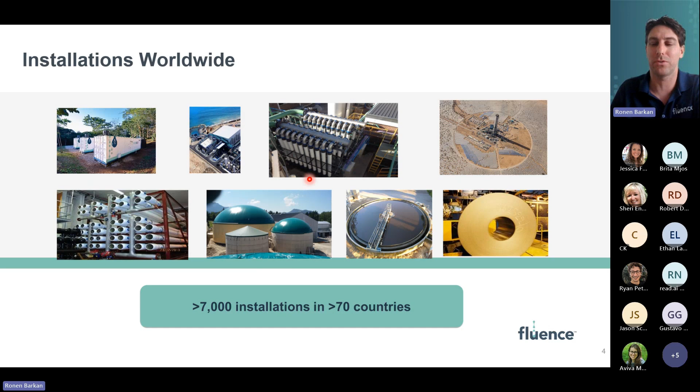So as I mentioned before, Fluence has over 7,000 installations in over 70 countries, addressing very large projects of millions of gallons a day. But then they're also addressing very small projects of as little as 5,000 gallons a day. So pretty diverse portfolio there. And the way we're able to address those different market segments is just by developing different product lines, which I will focus on one today, and hopefully you'll understand why.

The one that I'm focusing on today is basically a product that is geared towards what we refer to as decentralized application. By decentralized, which is shown on the right hand on the screen, versus centralized, we're talking about where the treatment of the wastewater will take place, or the water, right? So a centralized approach would mean that you're collecting water from different sources and then pumping it to one centralized location where it all gets treated. That is how many cities work, or municipalities.

And if you've ever tried to develop a new neighborhood or whatnot, many times you'll try to tie into the municipal sewer line, and that would mean that you're operating in an environment that is more centralized, right? Because you're connecting to a municipal line, all the waste goes into that line, and from there to a centralized treatment facility.

With technology, Fluence came up with a more decentralized concept, which basically means that we've come up with this product line that is able to locally take the wastewater and treat it, as I said, locally, and then treat it to an extent that you can actually reuse it. And so you're avoiding all these unnecessary pipes and piping, saving not you necessarily, but the city on the capital cost of putting those big pipes in the ground and then investing all the energy to move the water or the wastewater around for long distances.

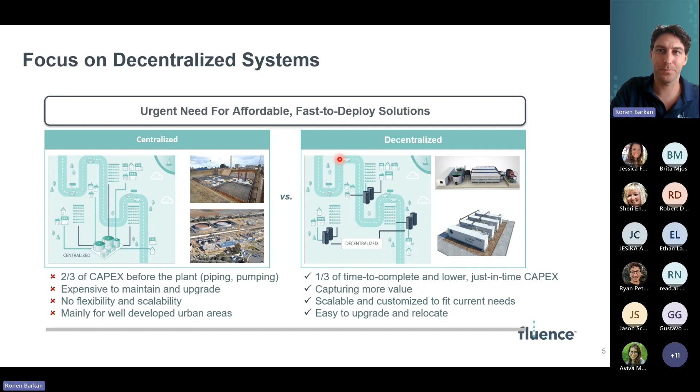As I mentioned, Fluence, we both are offering water treatment as well as wastewater treatment. So by water treatment, that means that, as I mentioned, you would need to provide potable water to that development. So you would either utilize a local source of water, may that be the ocean, so you would need a small desalination plant, or may it be a local well, so you'll need some sort of a brackish water treatment facility or something along those lines. That's what we call our NiroBox product line, which is shown right here.

And then obviously after that water has been used by the residents of the new development, it turns into wastewater, which is when you would need to have some sort of a wastewater treatment system. For this purpose, we're utilizing our Aspiral product line, which I will take you through in more detail today.

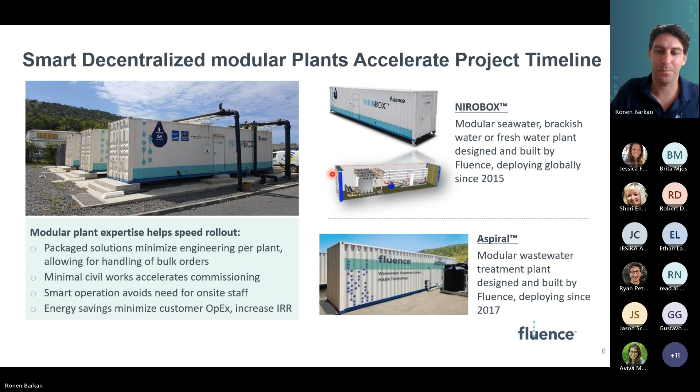So I want to highlight that, unlike many other companies in our industry who are mainly focused on municipal applications, and again, when I say municipal application, what I mean by it is that these are applications that are being initiated by a city or by a county or any municipality that essentially fund these projects with public money. And that has a completely different route on how things get done. It's a much slower process that can take anywhere between, I would say, as little as 2 and as high as 10 years to just take through the entire project. And it's an extremely expensive process because it needs to go through a bunch of checks and balances along the way that makes the whole process more expensive.

What we've done at Fluence, while municipal applications are definitely something that we look at, we look at, call it the real estate development market with great focus. And this is one of our target markets in North America, the Caribbean, and other places around the world. And the reason I bring this up is because what Fluence had done was to really try and put ourselves in a real estate developer's shoes and really understand their needs and come up with solutions, not only product, but solutions that would cater to those needs. So to try to identify some of those needs, that's how we look at it.

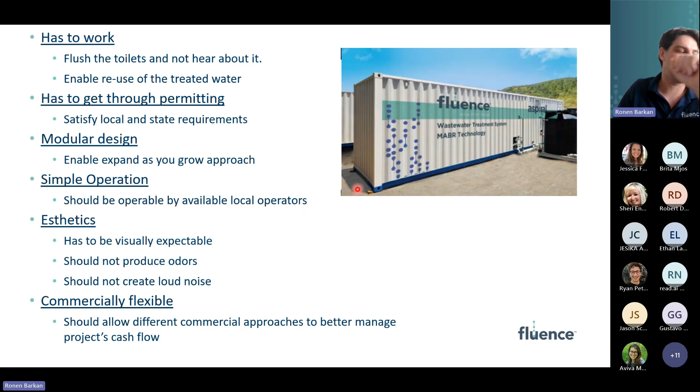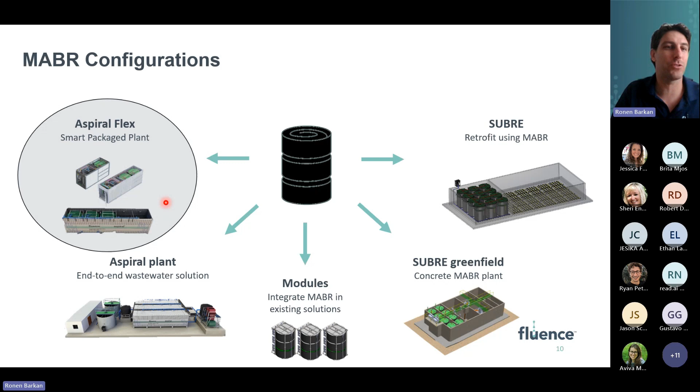So at Fluence, as you can all understand, we have multiple types of solutions and product lines. The product line that we're going to focus on for the rest of the presentation is what we call our Aspiral Flex system. I'm going to focus today on the wastewater treatment part of it. As I mentioned before, we also provide water solutions, but I wanted to focus on one because it's pretty much similar to the water side of things. And that's why I decided to just go with our package wastewater treatment solution, which is called Aspiral.

So what we have done, we've developed this product line that is built out of building blocks, and basically we call it the building block approach. I'm a big Lego fan. I always played Lego as a kid, and just like many other kids, I enjoyed the flexibility Lego blocks would have, right? You could build different blocks with Legos that would have different functions. We basically try to do the same thing with the wastewater treatment plant. Instead of your conventional Lego brick, we used a marine shipping container as the standard Lego brick, if you would. When I say marine shipping containers, it's not like we're taking used shipping containers, refurbishing them, and then modifying them to what you're seeing on the screen.

We build tanks from scratch, but we design them in the same size and dimensions as marine shipping containers, and we actually certify them as such. What that does, it helps us standardize all of our solutions. And so that means that from our standpoint, engineering and assembly efforts get reduced quite significantly, okay? Because you're always operating within the same volume, that same 40 by 8 building block.

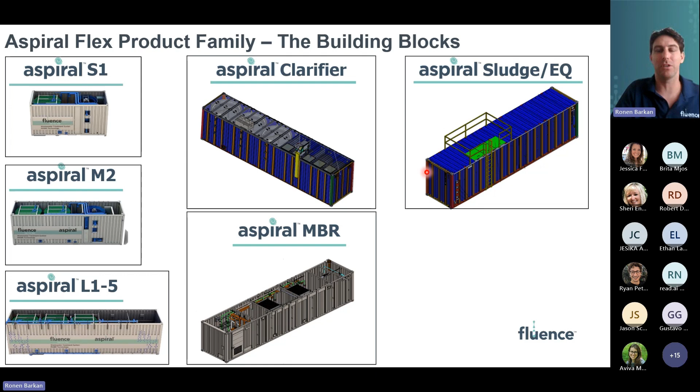So having these different building blocks as our tools at Fluence, we are able to put them together and customize a solution for different applications, without going through the whole effort of designing everything from scratch. We have those existing building blocks. It's all a matter of just putting them together. And I'll try to give a couple of examples along my presentation. So let's use one example for a residential development. Let's say that there is a new development which is going to be phased into two phases.

In the first phase, we're going to look at building 335 lots, which are going to have a couple of residential units on them. And let's assume that every residential unit would produce approximately 150 gallons per unit per day. So when I multiply 335 by 150 gallons, I get to approximately 50,000 gallons per day of wastewater that needs to get treated. That's how we would look at it. We would talk to the developer, try to understand how many lots they would like to start with, and convert that to how much wastewater we need to treat. We can assume what comes in.

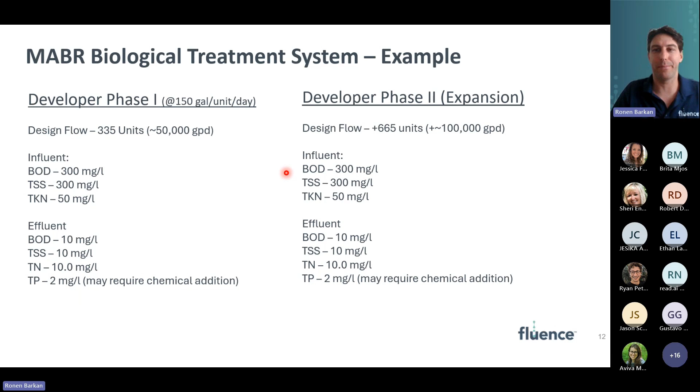I intentionally use the 1,000 number in order to try and work with even numbers and make things a little more intuitive. Okay, so once we understand how it would make sense to break out the growth of the development, we would start putting our building blocks together. For the first phase, for the initial 50,000 gallons or 335 units, we would need one equalization tank, one of our Aspiral L3 biological reactors, one of our ultrafiltration containers, and one sludge holding tank.

Just very briefly on each one of these building blocks. Each one of these building blocks is its own treatment unit, but treats a different contaminant in the wastewater, if you would. So, for example, the equalization tank.

Excuse me, I'm a little under the weather. That's why my voice is a little deeper than usual. So I apologize.

The equalization tank is a component that is meant to buffer the peak flows that a development gets, right? So when you build residential housing, most people take showers in the morning and in the evening. So a lot of water is going to come into the wastewater treatment plant during the morning and during the evening. But it does not make sense to design a full-blown treatment facility for those peak flows.

So what we do, we put what we call a dump tank or a buffer tank that would take those peak flows in the morning and in the evening, just accumulate the water, but then make sure that an even flow goes to the actual treatment facility 24 hours a day, 7 days a week, right? So instead of designing a big, large treatment facility that can accept those peak flows, we put a buffer tank in order to mitigate those flows and just treat the wastewater evenly 24 hours a day, 7 days a week.

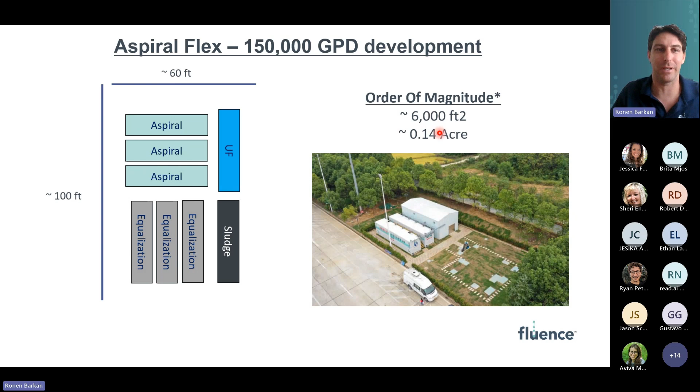So at the end of the day, to treat a facility of about 150,000 gallons per day or 1,000 little houses, you're looking at a footprint of only about 6,000 square feet, give or take, of course. In reality, the engineer that we work with will receive these types of documents, which really lay everything out, show how the piping goes, and show the types of piping that come with it.

I bring this slide in order to show that once we developed all of this product line around these building blocks, this enabled us to produce documents extremely fast that basically say, okay, dear developer, you want to treat only 335 houses now. This is how many units you would need: 1, 2, 3, and then the sludge holding tank, 4 of those units. We generate this drawing that you see in front of you in a matter of minutes.

We generate the bill of materials that is associated with the installation of these units, and that type of document can be sent to a local general contractor, and they read these types of documents all day long. So with this shopping list right here, they can give you a price estimate of what it would cost to deploy these units, also in a matter of a couple of hours. Okay, so everything gets streamlined, right?

Because again, all the product line is centralized around these building blocks, it's very easy for us to generate these automatic documents, or tools that produce these documents very quickly, to pass on to a local general contractor or an engineer to review and get back to you with some good numbers or budgetary numbers to go with. Okay, that's why the title of this presentation is Streamlining these utilities geared towards real estate developers.

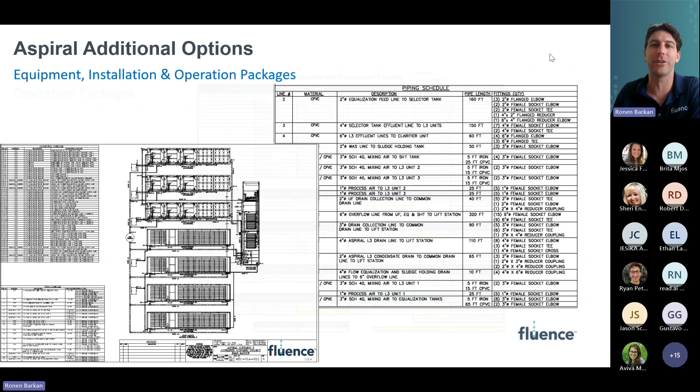Okay, so this is one type of document that we're able to generate very quickly, and then your engineer or your general contractors can take that and give you what we call a turnkey budgetary estimate on what you're looking at, and it's going to be pretty accurate. Okay, another type of document that we would produce would be what we call a 20-year life cycle cost analysis. So any solution that we come up with, we can then follow up with a 20-year life cycle cost analysis, which basically says, okay, for the next 20 years, operating this facility will cost you this much.

If you know that you're situated in a place that is either more expensive or cheaper in terms of labor cost, you can just tweak those numbers and you get a 20-year estimate on how much you're going to be spending, but it also gives you the annual spend, right? Because we understand that many developers are not planning to invest and develop a property and then operate it for the next 20 years. Many of them will just stick around for the first, call it 2, 3, or 5 years and then flip it, right? So this gives you the estimated cost of operating these facilities on an annual basis, but then on a 20-year life cycle cost, which you can then pass on to whoever is going to be buying this development.

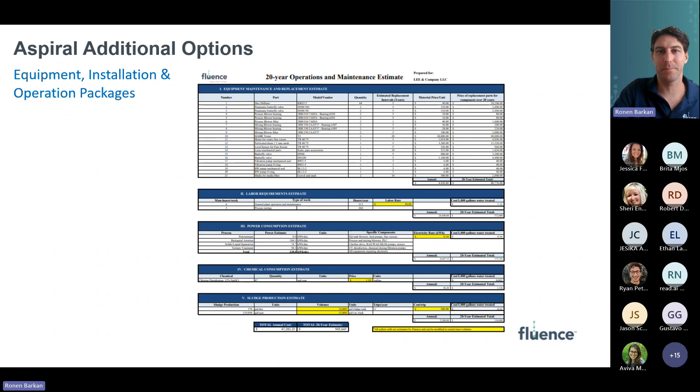Okay. And again, all of this gets streamlined. At Fluence, we produce these documents extremely quickly, because of the nature of this product line, that it's all pre-designed, pre-engineered, and ready to go. So we know exactly what each element that we add to it means. And because of that, this enabled Fluence to come in and say, you know what, we can offer the equipment, we can support you with the installation, we can support you with the operation of the system, and basically take all this burden away from you, and we'll come in and take over. And that leads me to the last point, what I showed in the slide, where we felt that developers need someone that will be commercially flexible, as I mentioned.

And that's why we basically not only developed the product that I just showed you, but we've developed a whole scheme of commercial approaches that we can work with the developers. So anywhere from a lease to own, if you would, for short terms, as little as 2, 3, 5 years, I would say. You can see these are just some examples where we would work with the local developer, we would lease them the equipment and basically help them own it during the time frame.

We can also do just a straight lease, right? Obviously, these things will impact the monthly fee and whatnot, but the bottom line is that we are geared up to provide, as I said, a lease to own, like you would have in other lease to own instances on cars, for example, a straight lease, or basically a complete turnkey sale, which we would say, okay, here is the equipment, here is the installation associated with it, here is the engineering piece of it.

So we would work with local engineers and permitting agencies to make sure everything gets permitted, and try to develop this package that would hopefully take a lot of the heavy lifting away from you, the developer, which will enable you to focus on other very important things that are associated with this development, while you can rest assured that you're being taken care of from the wastewater treatment side or the water treatment side.

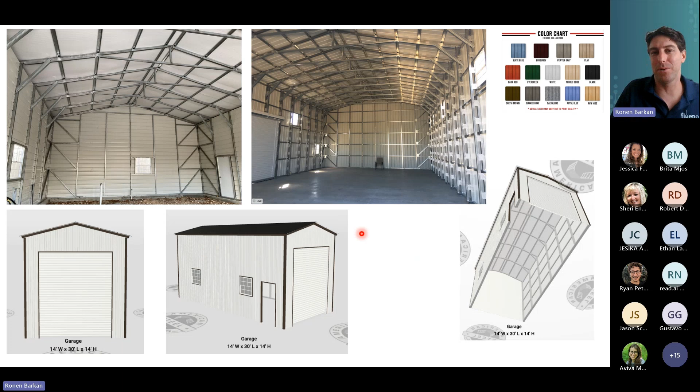I did talk briefly about how it's important for the solution not to be an eyesore, how it's important for the solution not to generate odors, not to generate noise. These are just examples of different solutions that we work. They're not necessarily what we do. In other words, Fluence does not provide shelters for wastewater treatment plants, right? Or we don't necessarily provide the painting on the wastewater treatment plant, but we are familiar with it. We have worked with different vendors to try and satisfy the client needs.

And my point is, we're not this type of company that tells you, okay, here's our product. Now you want to make it look nicer. Okay, good luck with that. No, we will work with you. We will try to offer some ideas that can work or that we've done before. That's why I'm showing some examples. You may like this one more, you may like this one less, but the bottom line is that we are familiar with it and we can accommodate different needs based on your drivers or your community and so on.

So I think this is a good summary slide for the value proposition that the Aspiral Flex or the Aspiral product line brings with it. Okay, so this is kind of a quick summary to what I've talked so far. Basically, we feel the modular approach, which enables you to build as you grow. So you only install the treatment capacity that you need right now, and then as you expand, you buy more equipment and you treat it there. That helps you to basically control your cash better.

I will finish with a real life case study. This is a mobile home park, or sorry, an RV resort. If the client would hear me calling this a mobile home park, they'll be upset with me. This is a high-end RV resort in La Pine, Oregon, which had an 18,000 gallon per day average flow with 42,000 gallons per day peak flows. I don't remember off the top of my head how many homes or RVs that includes, but you can see on the map here, probably a few tens of little RV spots in that facility.

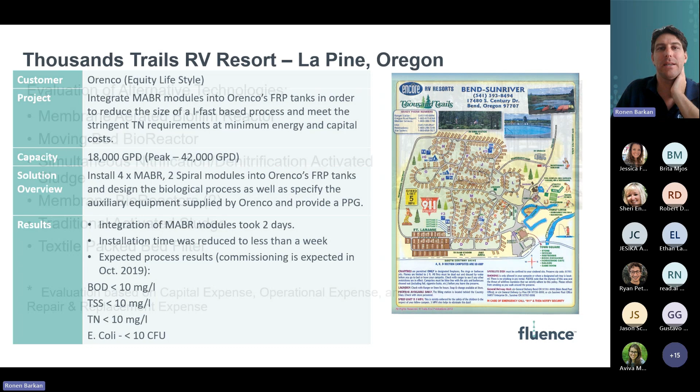So the developer basically spoke with us. We worked with them to see, okay, what would make the most sense. Again, I'm not focusing on the technicalities of this application. What I do want to show is that multiple other companies and technologies have been evaluated during the process. So each one of these bullet points is a different type of technology or company that could provide similar solutions. But when the developer took into consideration the overall capital cost, the overall operating costs of the system, the overall repair and replacement cost summary, the Aspiral solution came up on top. And that's why they ended up using us. Again, I can share this presentation with everyone and it will be available online, I believe.

Jessica will confirm. But the takeaway from this is that it's not because we are offering this nice modular solution or we're being very flexible on the commercial approaches that we charge you a premium. That's not the case. We are still very competitive versus other technologies or other manufacturers. So it's not like we are saying, oh, we're so modular, we can charge a premium on that.

No, because, again, remember, we also participate in municipal jobs or publicly funded jobs. So we need to know how to address those jobs. And there is some carryover to whatever we do here on the private side or on the development side, right? So my point is that we are still very competitive when it comes to pure capital comparisons, operating cost comparisons, and overall comparisons.

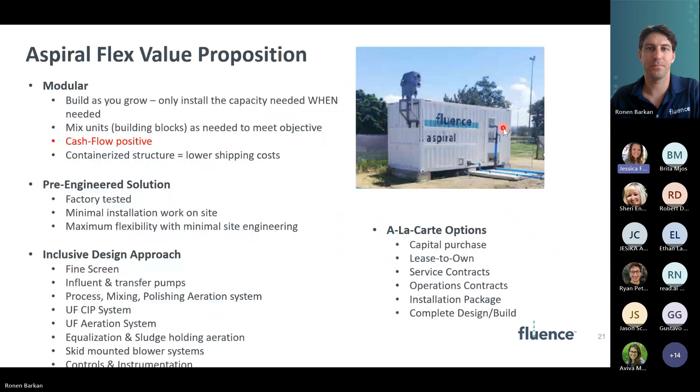The first question we have, Ronen, is what percent solids out of the sludge tank digester, and does it meet any volatile solids reduction and vector reduction? I'm sorry, can you repeat that one? I lost you somewhere. Can you see my screen? I'm reading the question as well. Yep. What percent solids out of the sludge tank digester, and does it meet any volatile solids reduction and vector reduction?

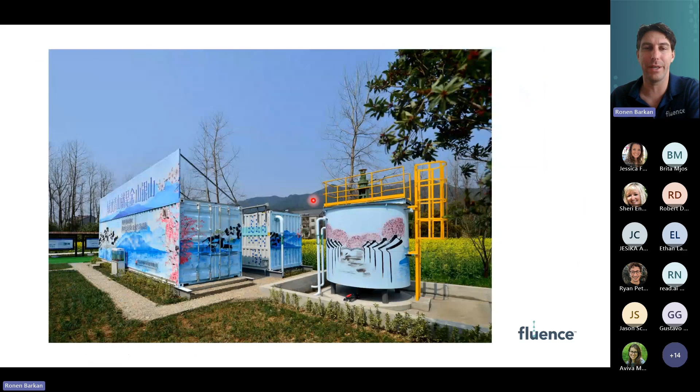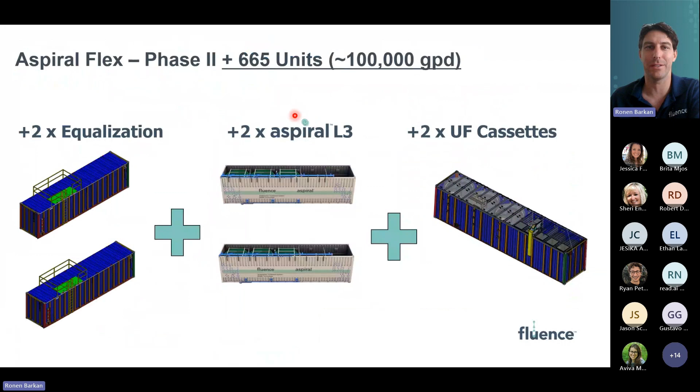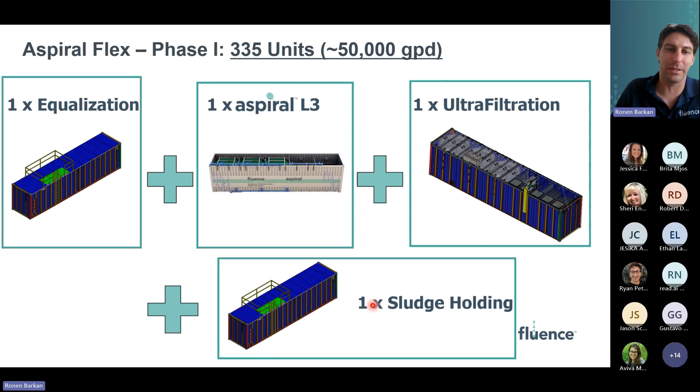Okay, so what we provide is what you call a sludge holding tank, okay, with a decanting option. What that means is that the WAS, this is a technical question, so I apologize if I'm saying some words which may sound like cuss words to you all. But basically, what we're providing is this sludge holding tank right here, and I have a data sheet that shows it. Perhaps I can pull it up on the screen real quick.

It looks great. Okay. So basically what that means is coming out of our process, as I mentioned, you're going to have some waste, right? What we refer to as waste activated sludge, or in short, WAS. That WAS comes out at approximately 2% of the daily average flow. So if you had about 100,000 gallons per day worth of wastewater to be treated, about 2% of that translates to 2,000 gallons a day worth of sewage that will need to be accumulated in this sludge holding tank.

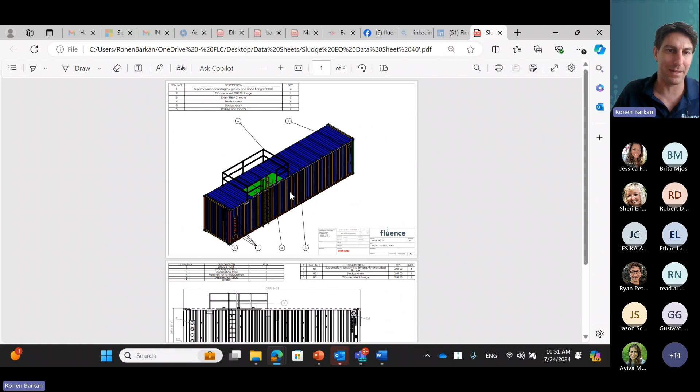But as you can see right here, can you see my cursor on the bottom side that I'm circling? Yep. What happens here, these flanges get connected back into the equalization tank because in this tank, the sludge out of our process has very good settling properties. And essentially, after about 40 minutes, most of the heavy solids would settle down. And then you'll have an upper phase of water, or what we call supernatant, which will then get pumped or just gravity flows back into the EQ tank, essentially reducing your sludge content for evacuation to about 1%.

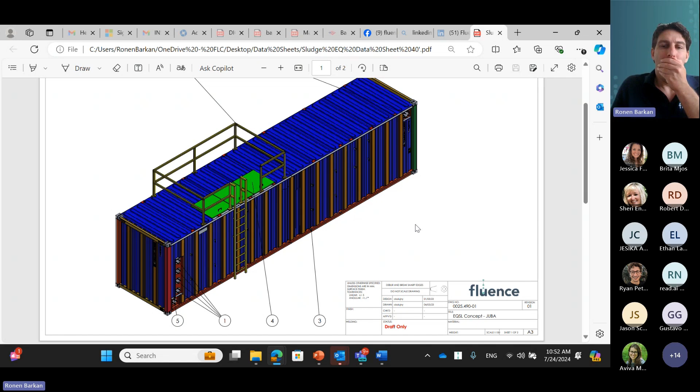So realistically speaking, if you had a 100,000 gallons per day treatment application, you'd be left with about 1% of that as sludge that you'll need to evacuate off site. So that would be about 1,000 gallons a day with a solid concentration of about 2%. I hope that answers the question.

Great. Thanks, Ronen. Should we go? Yeah, we have quite a few over on the side. Okay, so just going to read that out loud.

Can you speak to typical lead times for a system to be delivered in the Southeast USA as presented? So our typical lead times, typically we're talking approximately 6 months. Sometimes it can go a little quicker. Sometimes it can be a little slower because we are still bound to the shipping world, if you would, right? So sometimes there are no issues. Sometimes we do see some delays. 6 months is a good estimate to take into consideration.

I will say that sometimes we do have some available units, right? So that can be even quicker. I don't want to say immediate, but definitely quicker. But to give a simple answer to a simple question, I would answer 6 months as a lead time for the units to be delivered to the job site.

The next question is, do you have any installations in the Arctic or subarctic? So Fluence has multiple product lines, right? So the simple answer is yes, but the not so simple answer is that for this product line, the Aspiral product line, we have approximately 400 installations globally. Many of them are in cold environments, such as the northern part of Asia, which gets extremely cold.

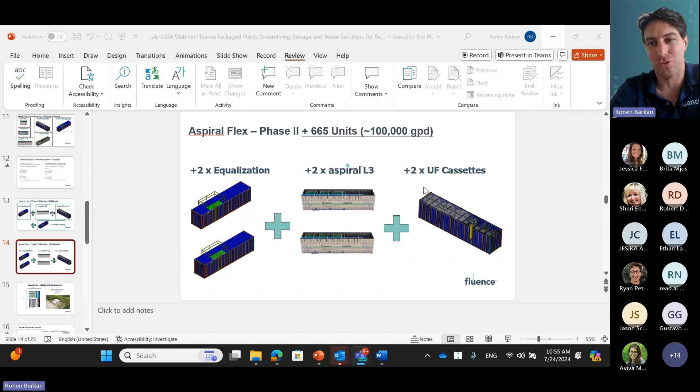Great. Okay. Next we have, for wastewater treatment, do you actually offer an MBR configuration? What membranes are you using, pore size, and membrane configuration?